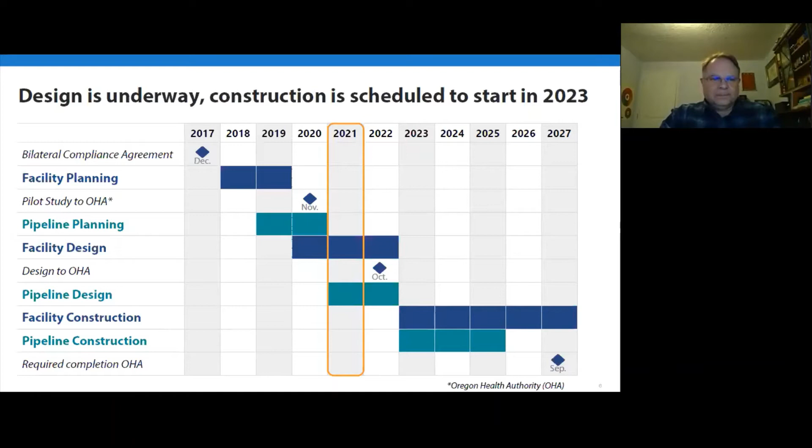So Patricia, if you wanted to tell us your New Year's resolution, that was the question of the day. Pardon me, I didn't catch, what was the question of the day? What is your New Year's resolution?

Well, actually, I'm going to try to lose some weight and start exercising, and I've been pretty good about it so far. Well, that's been a common theme with a lot of people on the call today.

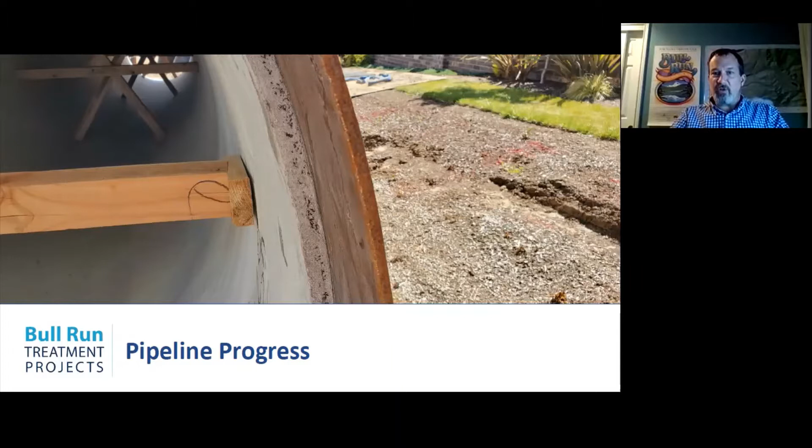Ken Ackerman again with the Portland Water Bureau. As Dave just said, one of our big things at the end of last year was we got Jacobs under contract. That was middle of December when their contract got approved, so we're just getting them up to speed. I thought I'd introduce Brad real quick and have him say a few things about himself. One of the reasons we hired him is his personal life intersects a lot with the stuff out here. I'll let Brad introduce himself.

I'm Brad Phelps with Jacobs, and I do have a personal life outside of engineering. We have a farm over in Montana, that family farm. We operate about 10 square miles of dry land, wheat and canola and various products over there, and I get to enjoy going over about 3 times a year. I hate driving combine anymore because they're self-driving combines. Last time I drove a combine was about 5 or 6 years ago, when I handed the wheel to my 8-year-old daughter, because it's basically a push button process. Anyway, I do have rural roots, a little different than being brought up in the city. I've been in the engineering business for about 37 years now, all with the same firm, and my background is in large diameter pipeline infrastructure projects and water supply systems.

Thanks, Brad. And Brad's leading a team of 12, I believe, firms, 10 or 12 firms, so we have quite a good sized team involved.

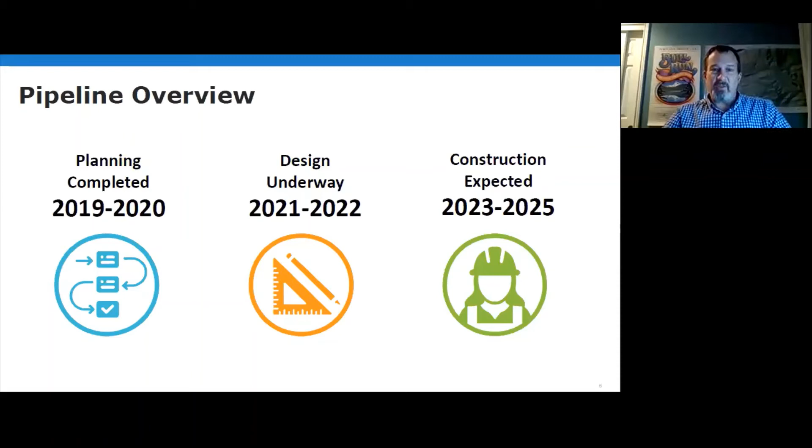So I think it was July of last year when we talked about the pipelines, the routes, and the alternatives we were looking at. We got a lot of community input. We also had an open house where we got input on the different pipeline routes. That input was very helpful. We looked at it, and we also looked at the engineering design and cost options. I know there was a lot of input about the raw water side and different routes, maybe avoiding running through properties. I'll remind everybody that the long pipe is running along an existing easement that was purchased by the Water Bureau, mostly in the 70s and 80s, with a few changes in the early 2000s.

So we chose that route. It also helps us with resiliency, and gets us away from the existing pipes in the road. We would be doing the tunnel just north of the county line. We looked at some open cut options and the impacts to those, and we chose to stick with the tunnel option. It's resiliency-wise, surviving earthquakes, a solid option.

We also got a lot of input on the option of running down Carpenter Lane. That option was not selected, so we're running down Dodge Park with both pipes until we get about 2/3 of the way up Dodge Park to Altman, and then we'll have one pipe going cross country over to Lusted Road, then north up Altman from Lusted Road for both pipes, tying into our existing conduits.

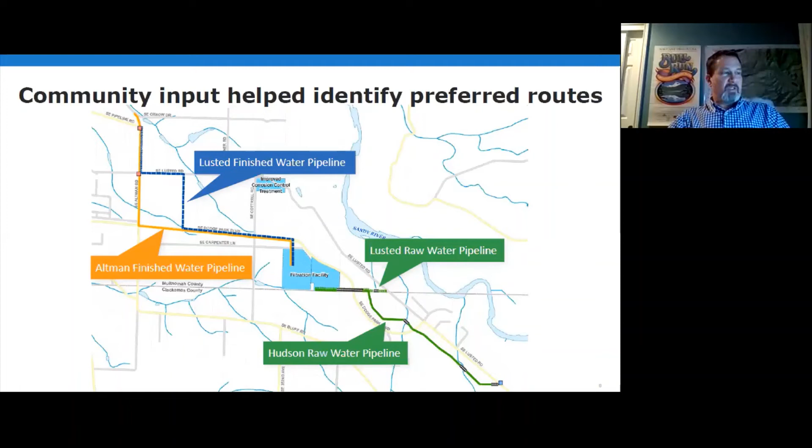So jump to the next slide. We talk about it being 2 years, and I'm sure everybody's thinking, what are we going to spend 2 more years doing?

So the first part of this spring and summer, we're going to be gathering a lot more information. We have those preferred alignments. We've done some work on those alignments to determine if they're feasible or not. We need a lot more information to get into the detailed design.

We'll be talking more about the geotech work we're going to be doing coming up. We've done a lot of the survey work. You've seen surveyors out there along the roads, and late this fall, our Water Bureau surveyors were out along the raw water alignments, getting all the information on what exactly is there, trees, driveways, all that kind of stuff.

So we'll be pulling all that together, looking at exactly where the pipe goes, how it winds through the different properties, where it fits in that 100-foot easement to make the most sense, what all the impacts are to trees, houses, existing utilities in the roads, where the tunnel goes exactly, where it comes up on the site.

So that preliminary stuff is going to be done the first half of this year. We'll do the same thing that the treatment plant did. We'll do a basis of design and lock all of that stuff down. It'll be reviewed by the Water Bureau, and we'll get all of that locked down, and then we'll start into the preliminary design, which is like a 30% design, getting all of that information onto plan sheets that go to the contractor.

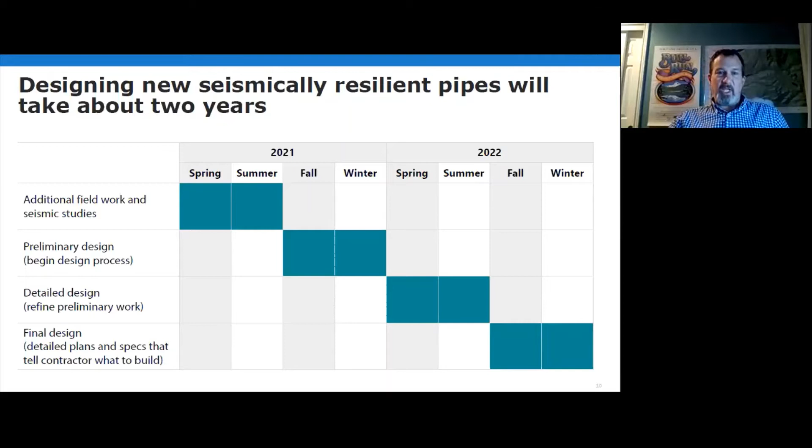I know everybody's aware the geotech work we're talking about will be out there. This will be the third time. The first time we got some information, and then we went out and looked at more information on the alignments we were looking at. Now we're going out and getting more detailed information in between. Right now we have a hole about every half a mile along the alignment, and for design, we like to have geotechnical information about every 500 feet.

So that's what to expect during this first 6-month period of time, gathering a lot more information in the field. Brad's going to talk a little bit about the geotech work that's coming up starting in about 6 weeks. Some of you may have seen, we were out in the field last week looking at the access and how we're going to get some of the work done. So Brad will continue to be out there. I will continue to be out there working, and Brad can dive in a little bit more about exactly what we'll be doing.

Brad, you want to jump in? Yeah, let me get myself prepared here a little bit.

We're onto that slide. I've got about 4 slides here, giving you an idea of what life is going to look like for us and some impacts that you're going to have as a result of this drilling episodes out there for the next number of months.

Again, like Ken said, what we're doing is filling in the gaps of the subsurface information on the specific alignments to have a better understanding of what exists underground. We want to do that before the contractor gets out there, so we know what to expect before the contractor gets out there as well.

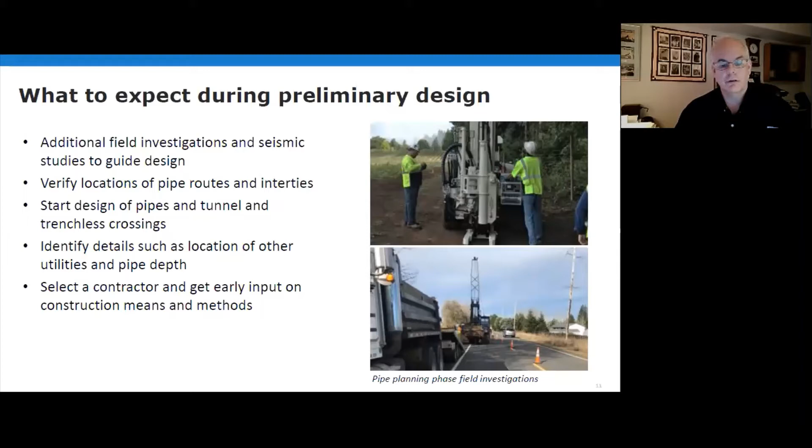We've got a generalized idea from what's been done before. Now we're going to hone in on more detail by doing more borings. We plan to start this work mid-February to 1st of March timeframe. Our work is going to be very similar to what you saw before with drill rigs out there. We're going to be typically drilling about 50 feet deep.

We'll also be doing possibly some potholing associated with identifying other underground utilities and their depths, so we don't have a conflict with our large diameter pipe and some of the other utilities that are out there.

The additional borings will start mid-February to early March. We are going to be doing about 65 borings along both pipeline routes total.

Some of the work will happen in the public rights of way, and some will happen within the easement or on private property. The locations of the borings have been discussed with the affected landowners, especially on the raw water pipeline. Ken's been doing a great job explaining to people out there what to expect and paving the way for us to come in. The locations of access have been discussed and defined to us by Ken and the Portland Water Bureau.

What you see in this photo is an example of a drilling rig called a rubber tire drill rig. You'll see this primarily on the roadway or the finished water pipeline alignment. This type of vehicle requires a firm surface to drive upon so we don't rut up farm fields. We'll show another slide of a different type of drill rig next.

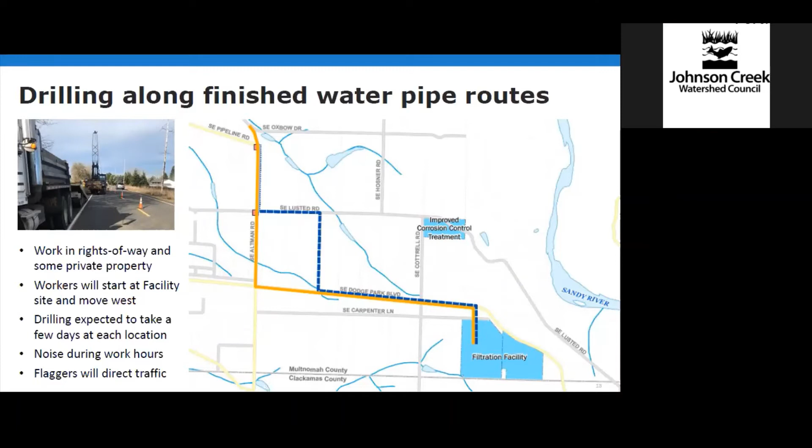Just want to pause real quick again. Patricia had typed into the chat that improved corrosion control treatment is shown on the slide but isn't on the pipeline route. It was just for reference, so that way it can help people understand where we're at on the map. So you're right, it's not on the pipeline route, it's just to help people acclimate themselves on the map. Does that answer your question, Patricia?

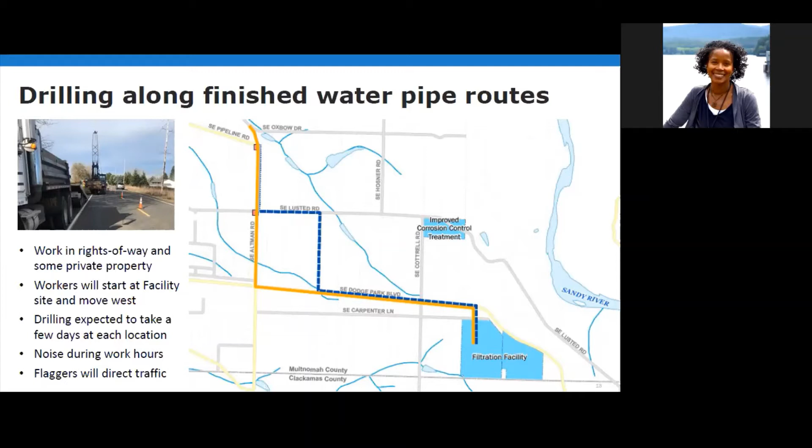So along the finished water pipeline, we plan to do 37 borings. There were 14 borings done previously along the finished water alignment options. Again, most of the work will be done by the rubber-tired drill rig within the pavement area. As we get off of the pavement onto the north-south section, we may bring in the track rig due to the softer soils in that location.

Similar to what's shown in the photo, you see traffic control with the drill rig. We will have traffic control, and then each night the traffic control will be removed. The drill rig will be moved off of the road, and off of the work hours between 8 and 4:30, the road will be returned to its normal traffic 2 lanes if we're in the right of way. The road will be cleaned of any dirt and mud each night so it doesn't become a hazard. Of course, the cones and traffic control are for protection of workers and also the traveling public to move around the drill rigs each time.

We will be shutting down 1 lane as we're drilling in the road, though. Each boring will take a couple days, it may run a little faster, may run a little slower. Our plan is to start at the filtration facility and work our way to the west and then to the north along Altman.

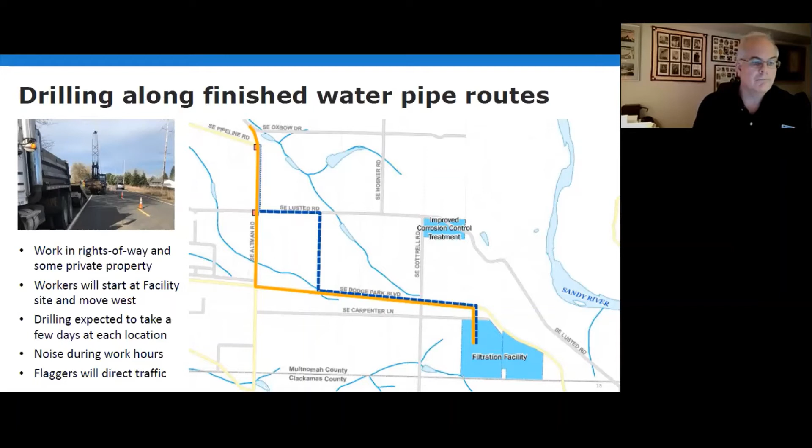We most likely will be starting at the Hudson Road intertie and moving towards the facility, but it will be weather dependent. We don't want to get out there in a muddy field and muck up everything. It causes a lot of issues for us to go back in and repair and make good, nor do we want to start it to begin with. So we may hopscotch around a little bit on the raw water side, but in general, we're going to work from the south to the north.

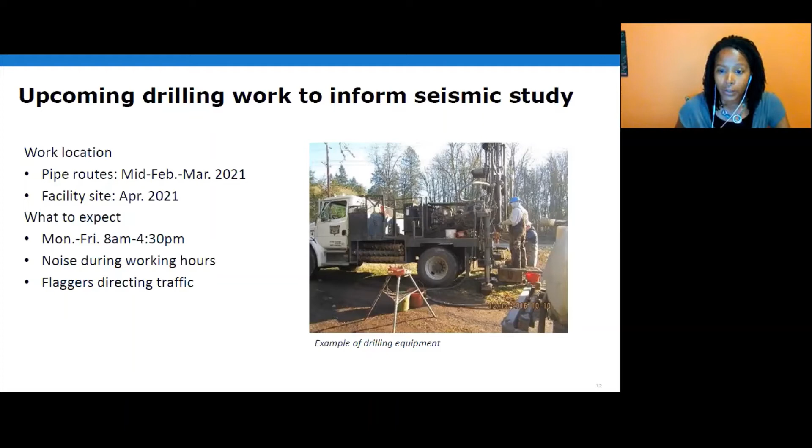So is there anything else that anybody, let's see, Patricia says, will there be traffic alerts prior to the drilling work? Yes, that will be on the website, and we'll have the dates on the postcards and door hangers with the traffic and noise dates and times.

Any other thoughts, ideas, questions about pipelines? Oh, noise level expectations. Will those that work at home be affected? Let Ken and Brad take that. I would imagine that it would be pretty noisy.

Potentially, yes. We are looking at that. We are trying to do things to mitigate that and work times. I know we've talked to one owner on the raw water side who, yes, has a few kids at home doing school and also works from home. So we're going to work with them on the time we drill and try to make sure that it avoids meeting times and times the kids are in school. So we're going to try to be working with people because we are going to be closer to some homes. And with everybody home, it may be a little more of an issue than it had been in the past. So we'll definitely work with people.

Patricia says many people travel these roads but don't live here. How will you notify these people?

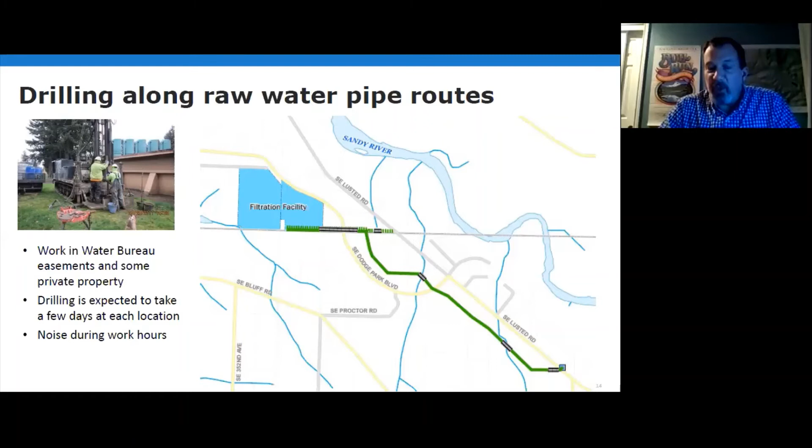So that will be one new pipe running from Hudson up to the county line and just north of it. Then we'll have a second pipe that ties into the existing pipes in Lusted Road and runs straight west, and they'll both go through the tunnel together to the filtration site.

Second pipe, that's the one I'm interested in—you're not reusing pipe 2, 3, or 4? From Hudson's intertie to where the second pipe ties in, we will be reusing existing pipes. They're in usable condition, and we can control all the flow at Hudson's to take the flow coming in and get it into those 2 conduits. We only need 2 to get the flow we need.

So is the intertie already set up to accommodate the eventuality of the 2, or will you have to do more construction work eventually when the new pipe is in place?

We will tie into the 2 pipes at the north end. At the current Hudson's intertie, there is a connection set up to tie in the new pipe that will run along that 100-foot easement. That's what I needed to know, thank you. And at Hudson, we have the ability in the future to run the water up the existing pipes, the new pipe, or both, or one or the other—especially for testing.

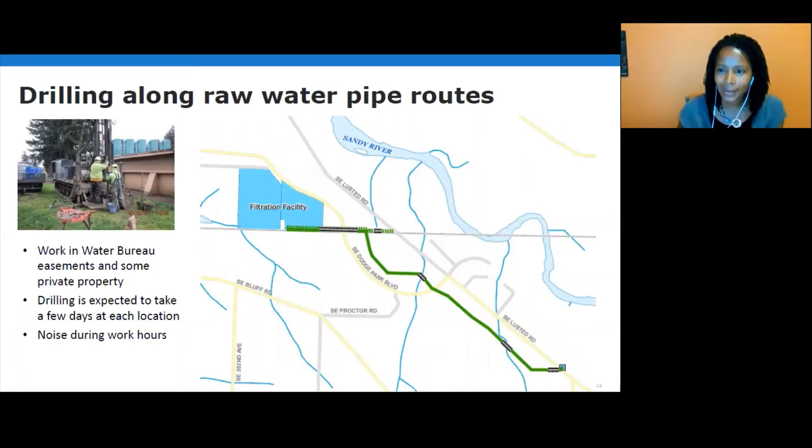Anybody else? Anita, do you want to talk about the geotech work on the filtration site itself that will be in April? After this geotech work is complete, there's a plan to also have geotech work on the filtration site. There will be drilling in the area expected for an additional month after the pipeline drilling is happening, but we'll keep you posted. You can go to the site to find the latest information, and we'll be sending out information and putting up door hangers for those most impacted by the sound.

Hi again, everyone, Casey with MWA. Tonight I want to provide you an update on some of the design activities we've been working on and the current status of our site and facility design.

The preferred site layout strategy is now based on the North Campus design. This layout concept provides better options than the South concept for the treatment process itself and the water flow through the plant. It does cluster the facilities further north and east, making for a more compact development, which means less excavation overall, and it allows for options of site entry from either the north or the south.

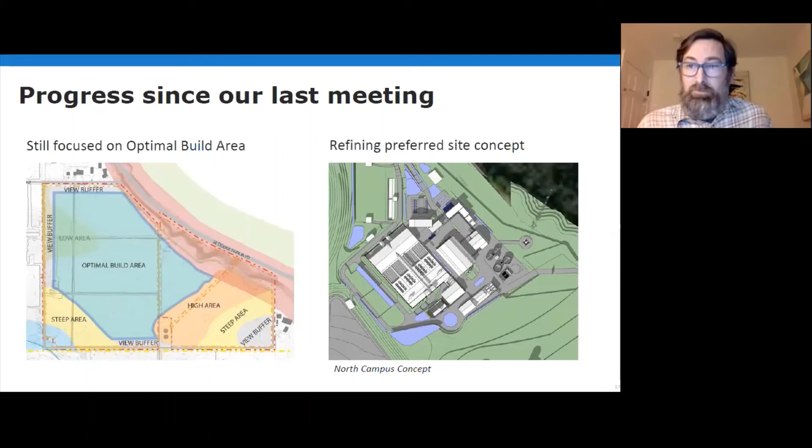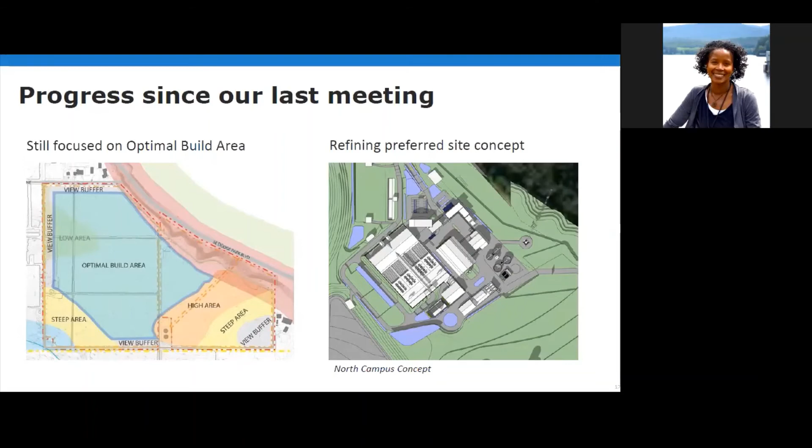So turning to the building architecture, the design team worked on several concepts, and we developed one concept that we called rolling fields. This concept is inspired by the landscape itself and the topography of the site. We are working to combine elements of both the Pacific Northwest and the agrarian styles, which this group preferred based on our last discussions.

We are using some of your preferences along with preferences we got from the open house participants, such as trying to blend the facilities into the site as much as possible. To really accomplish that, we're using low, simple building forms with sloped roofs. Some roofs may be vegetated, other roofs may have solar panels on them. We're also looking at the Columbia Gorge Scenic Area guidelines, such as using warm, dark earth tones on the buildings that will help blend it more into the surrounding landscape.

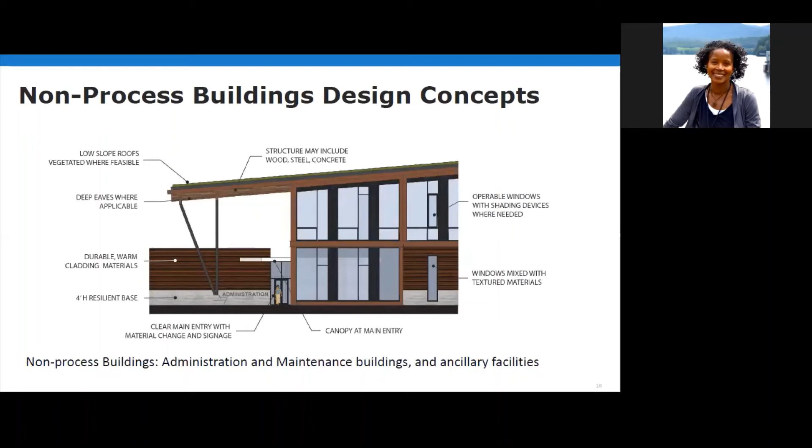Next slide. Just want to pause real quick, Casey. Andrew had asked if we can say more about the stormwater management differences between the two site options, and I know that Ben's going to be getting into that shortly, so I just want to acknowledge that he had that comment. Okay, yeah, I will let Ben address the stormwater stuff.

The architectural team is now using this rolling fields concept to develop design guidelines. These guidelines will help us in the detailed design phase, which we're about to enter.

Buildings in this facility are basically separated into two types: non-process and process. These are buildings where people are versus buildings where machines mostly are. Non-process facilities include buildings like the administration building, the maintenance facility, and some ancillary facilities.

This image is an example of the design guidelines we're working on, giving us direction for how to approach design this year while allowing flexibility as needs change. You can see guidelines calling out how to treat roofs, incorporate eaves and overhangs, mix resilient materials like a concrete base with warmer materials up high, and mix in windows to provide functionality for the users.

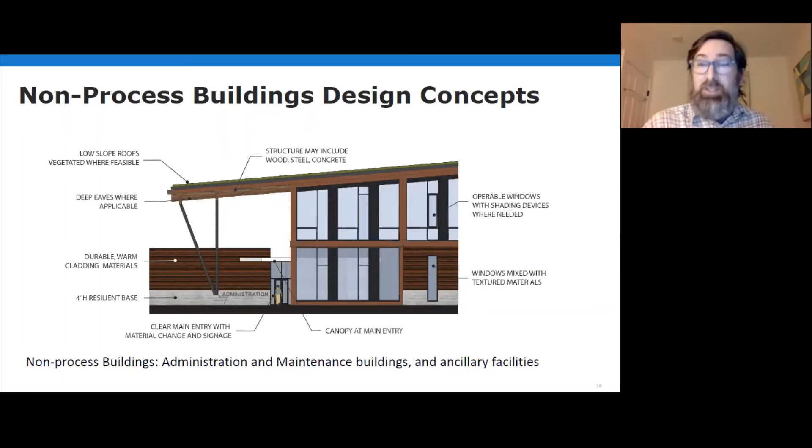The next slide is a concept rendering showing the basic form and massing, and some design guideline ideas for the administration building. This will be the front door of the facility, where visitors check in and most staff work. This very preliminary idea reflects the general look and feel of the architecture, and we're going to refine that this year.

We're going to continue to take input from the site advisory group. We have to follow code requirements of the county and state, as well as city sustainability requirements, and of course the good neighbor agreements we're working on with you right now.

So before I move on, are there any comments or thoughts or feelings about the non-process design as it is now?

We have a question from our guests: are any of these buildings open to the public? What percentage of the facility?

In general, when the public signs up for a tour or is visiting staff, this administration building would be considered open to the public. This is where tours start and end, and where we may have interpretive elements in the lobby for people to learn about the plant. Depending on what kind of tours are offered, you may see more buildings, but this would be the main public building.

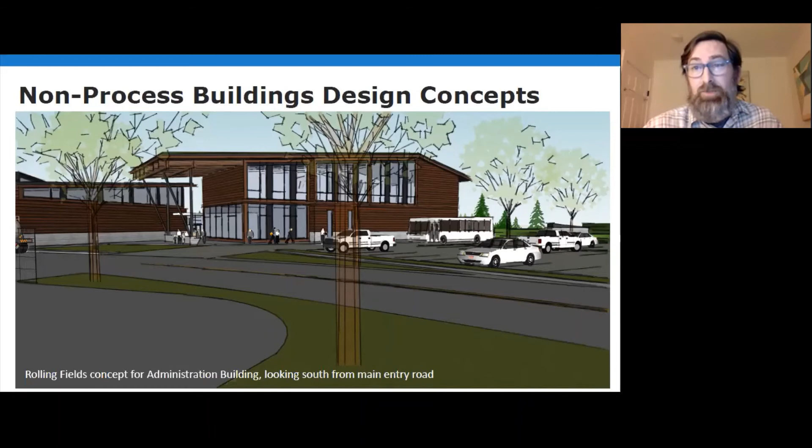Patricia had put in a comment shortly after the question about the number of people employed at the administrative building, clarifying that it's just at the administrative building. So I'm guessing that the number of employees Casey was talking about was just at the administrative building, is that correct, Patricia? If that's what she meant, then that total number includes engineers, maintenance staff, and people operating the facility, operators, yeah, that'd be everyone. So 15 in total, somewhere between 15 and 20 is what we're working with right now.

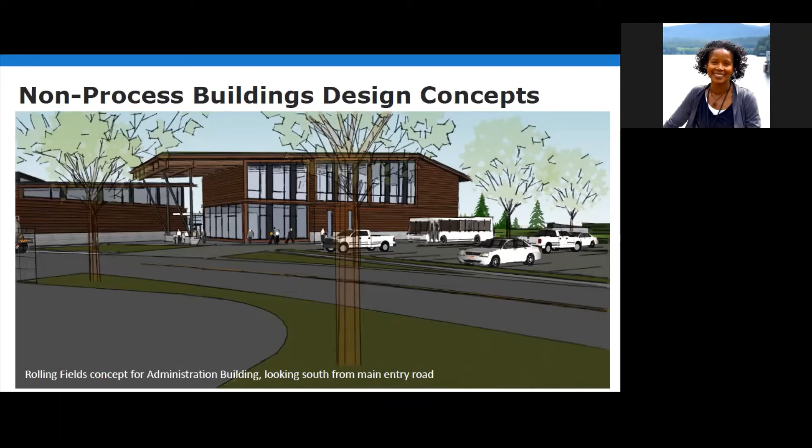So similar to non-process buildings, for the process facilities we are also working on similar design guidelines. Process facilities include buildings such as the chemical building, the dewatering building, the ozone generation facility, and the main treatment basins. The image here is an example of the general guidelines applied to the process buildings.

Similar, but also different than the admin building. We still want to move forward with strategies that give us flexibility to change things as the building changes due to engineering requirements, the treatment process, etc. So here you see these similar guidelines, but with an example of a variation in color where we may want to explore a blue-gray type color. None of the colors are set in stone. This is just an example of how the guidelines may play out and help us achieve a unified facility once it's all done.

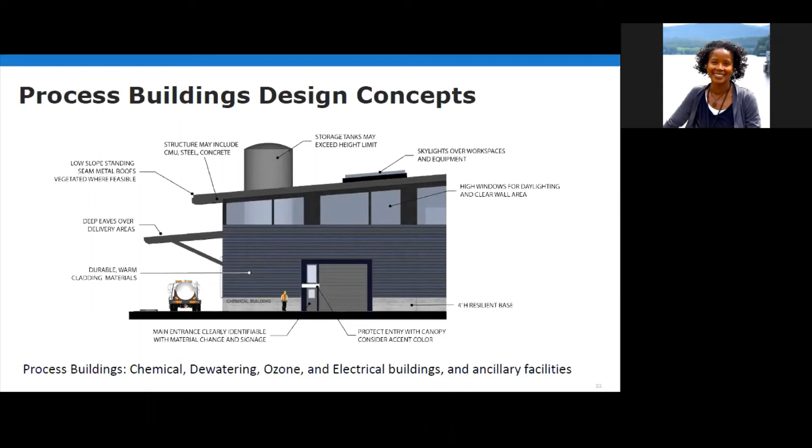Additional design guidelines are going to be developed for the other facilities, such as the concrete basins, where a lot of the actual filtration happens. In addition, the landscape architects are working on the landscape buffers and guidelines for the vegetation, which are under development - you'll hear a bit more about that later. So all of this hopefully provides us guidance to reduce the visual impact of this facility, help it blend into the landscape better, and help it fit in with the agrarian and Pacific Northwest styles of the region.

So any more, let's see, I'm going to go to questions now. Yeah, I have a question from Pat: how does the storage tank height compare to the existing Pleasant Home tanks? These storage tanks, which we're planning, I think are about 40 to 50 feet tall, whereas the Pleasant Home tanks that exist now, the two tanks existing, I think are 110 feet tall. So they'll be approximately half as tall, I think. And these would be some of the tallest tanks on the site, here at the chemical building.

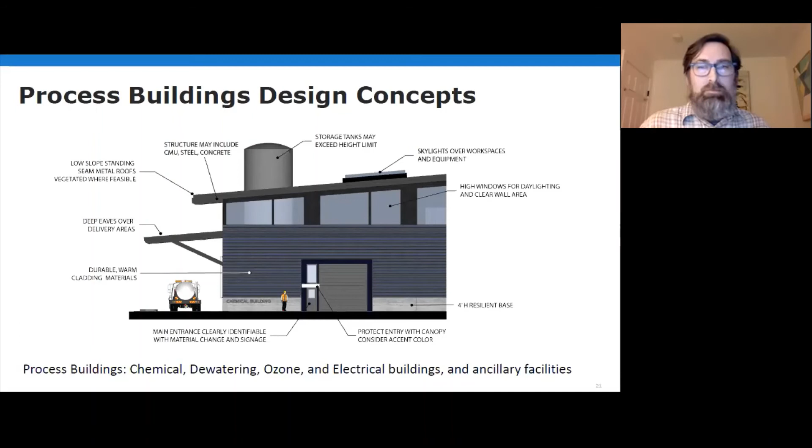So, sorry, I forgot I have one more slide, just another perspective view of this chemical building, the next slide. It is one of the larger buildings on site. It has a lot of storage tanks in it and operating space within it. This is nestled kind of in the center of our development, and this is a view from the internal plant road. From a neighbor's perspective, you'd never really see this point of view. You'd see the shorter end on the right, perhaps, but maybe not so much even with the landscape strategies that Ben's going to talk about.

So with that, we can always come back later with more questions, comments. We welcome any ideas. I know I've read Jane's comments from last time, and I feel like we're in alignment with some of Jane's thoughts about the architecture and the materials. So we look forward to continuing working with you guys on this.

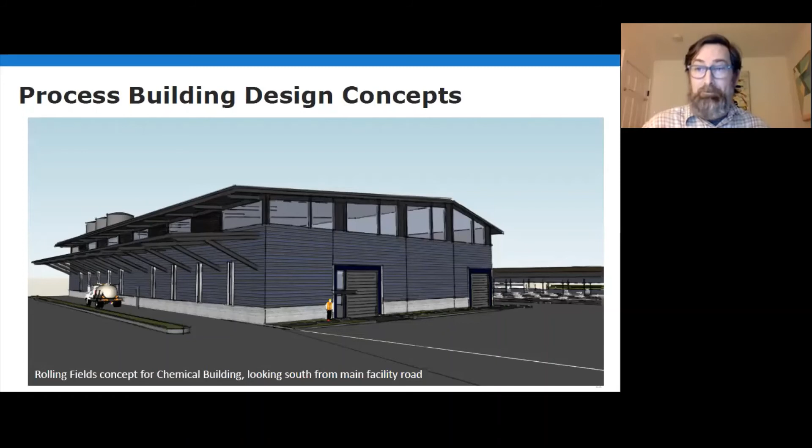Hi, everyone. My purpose tonight is to talk briefly about our stormwater management strategy. Before I do that, I want to recap the landscape design concept that was influenced by you, the site advisors.

Our preliminary landscape concept was developed in concert with the site plan that Casey talked about earlier. The western half of the site will be the primary development area of the filtration facility, leaving the east not untouched—the pipeline will likely come in from the east—but the remainder of the site isn't really slated to have permanent improvements. The whole site will be touched in some way during construction to build the pipeline to deliver water to and from the site.

So any area that does not have buildings or paving as a finished condition will be vegetated in some manner, unless it's rededicated for agricultural use.

At the western portion of the site where the filtration facility is concentrated, we're imagining the facility will have a security fence surrounding it with controlled gates for access points. The fence will be located away from the property edges so it can be hidden from view. So we started to talk about inside the fence and outside the fence.

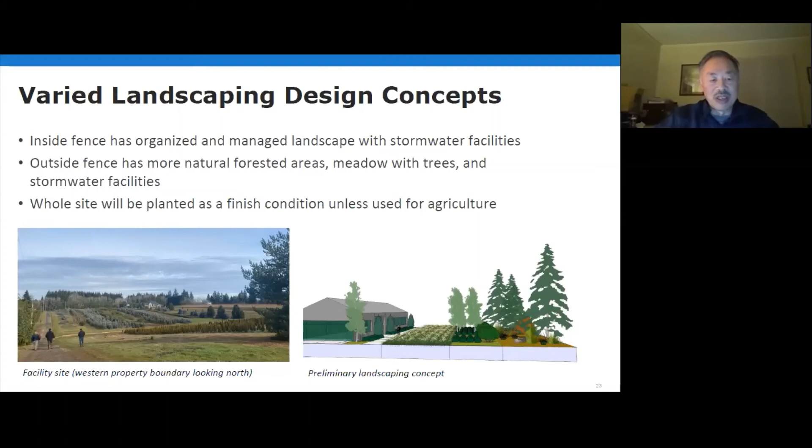Quickly talking about the stormwater strategy, to answer that one question about between the 2 schemes, the north scheme and the south scheme—it wouldn't have mattered which scheme was selected. The stormwater strategy is really tied to the characteristics of the piece of property and the surrounding properties.

Stormwater naturally flows off the site onto neighboring property, currently at 3 low points. One is near the midpoint of the western property line. It also leads directly into Johnson Creek at the southwest corner, and it leaves the east part of the site at the southeast corner.

The soils are heavy in nature, and once saturated, they don't infiltrate at a very high rate, so that's a large consideration for us. We plan to manage runoff from the new paved surfaces and buildings and not increase the volume of stormwater leaving the site today. We hope to manage the higher storm events.

So we were thinking about what happened Tuesday, and Jason looked up—I guess the average rainfall was 1 inch on Tuesday. So I'm kind of wondering now how this site and the neighboring sites sort of manage that.

Our design goal is to manage the 25-year event, even though we're only required to manage a 10-year event. We'll use vegetated facilities throughout the site to treat, convey, and slow down the movement of stormwater. We'll establish trees, understory, and general vegetation to help mitigate stormwater through uptake in large trees, as well as spending more time on site so that evaporation can help that stormwater equation.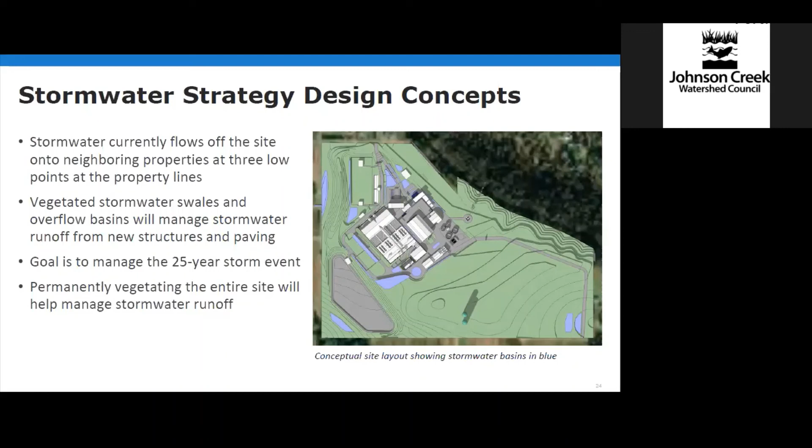All right, we have a question in the chat from Dean and Pat. Is the road on the east side of the PWB property, or is that a road on the east side of the PWB property? How close is the road to our property to the east? If that is a perimeter road, how many trucks or cars will use that road? And we do not want traffic sounds in our backyard. Will this road be used during facility construction? That's a lot of questions, but I think we can handle it.

I don't know if that's an appropriate question for you though, Ben. I'm going to pass that to others, because I think Casey had mentioned that this is the concept we've been working on for several months, but the access road issue hasn't evolved much. So anyway, Casey or Jeff...

I could reiterate, Dean and Pat, I'm afraid we cannot answer any of these questions right now. What you see is a concept based on a general notion of how to maintain as much agricultural land as we might be able to. There is a lot of study happening still about the alignments of both the north and south access road, and the property easements that'll be required. I'd say, this year, look forward to more detailed discussions between the Water Bureau and the design team and your fellow neighbors to really figure this one out. It's going to be a tough nut to crack, but we will work with you guys to mitigate all the issues you raise right now about traffic, noise, and impacts. So I'm sorry I don't have anything better for you, but we do have team members working on it in earnest.

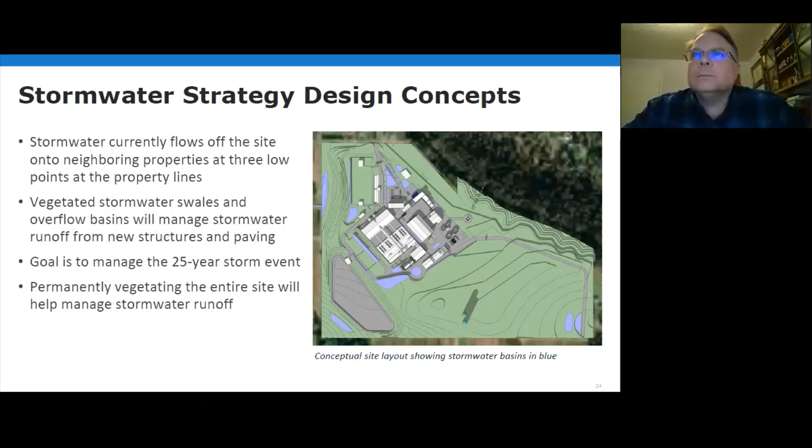Lori, what phase is the architect currently working on? We're in the design phase. We finished up the pre-design, and that's the concept that's being shared in the basis of design report, and then we're going through here. Now, as we finalize these choices, we'll be moving into design and actually start putting buildings onto drawing sheets.

Did you have other things to add, Casey? Since they're an architect too, I could tell them that we just finished up the conceptual design phase for the basis of design report. Once all of that gets approved and they set us off on the next phase, we'll be in 30% design. I think the goal is to complete or almost complete 60% design by the end of this year, maybe January or February of next year, but we do hope to get about halfway through design this year.

I don't want to keep everybody too long, but I do see there's one more question about the loan, and we have not received notification about that yet. I know they're still working out some details, but trust me, when we find out, we will be letting people know.

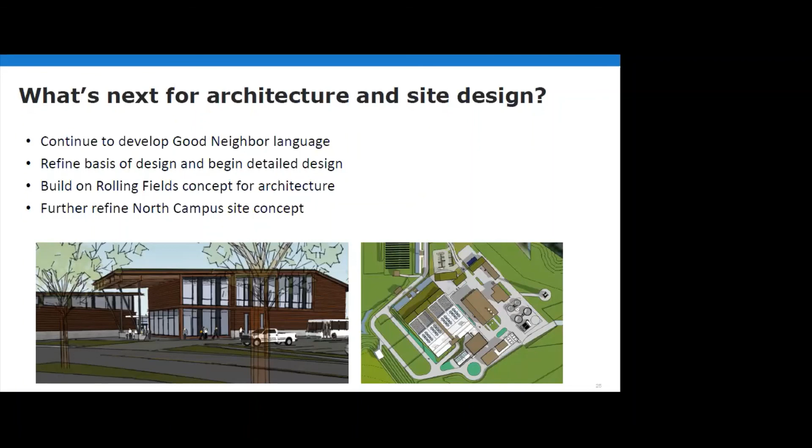Well, next month we do have our construction contractors coming, and so we want to give you the opportunity to hear that. If we're interested in having some other conversations in the meantime, or if there's something we can post on our website that would be more helpful, let me know about that. Dave, did you want to address any of that?

Yeah, I would ask, if you're willing to wait till March, I think what we can do is have our updated costs for these facilities laid out. We can talk about that. We can bring our finance person who can talk about how this has been factored into rates as we move into the future. It would just give us more time to give you more updated details on the costs and where these are going. So if March would be okay, I think we could give you the most complete picture of the current state of the financing of the project.

It's not something we can just simplify, it's not a simple issue, and I do think it would warrant having our finance person here to be part of the conversation.

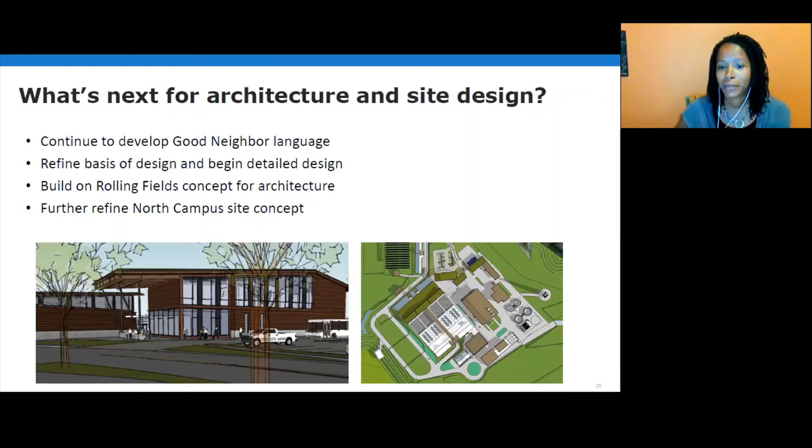Thank you. If we can pause that for now and let people enjoy the rest of their evening. For our next meeting, we'll be talking about facility construction. We have a lot more to talk about with design, so I'll keep you posted on that as well, because I know in March we were planning on having some more discussion about the Good Neighbor Agreement, but it sounds like we're going to talk about costs at that time. We'll also want to have more conversations about design. As Casey mentioned earlier, we're going through this process, and there are a lot of touch points, and there's just a lot to try to get through in a meeting.